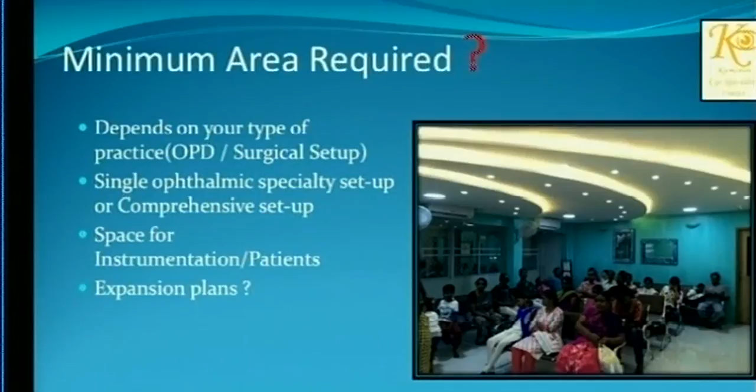What is the minimum area required is a very difficult question to answer, and as a single practitioner or a group practice, plan everything for 5 to 10 years from now on. How many patients you want to get, what is the location, whether you want to set up a single ophthalmic practice or a comprehensive ophthalmic practice. So all this has to be decided initially so that you could design your OPD, the structures of the toilets and the theater, everything. And always have future plans in mind so that you can always extend later.

So the main principles to be taken, see, a lot of time you will find yourself traveling in the right direction, but in a totally different road. You'll never know.

Only when you arrive at the destination, you'll find that you are in a totally different place. For example, you finish the RCC structure, then you call the fire engineers or the HVAC engineers. They say you have to break this and break that. So it's very difficult. Have a plan before you venture into the project. Keep on planning continuously with the architect, and only then it will be helpful.

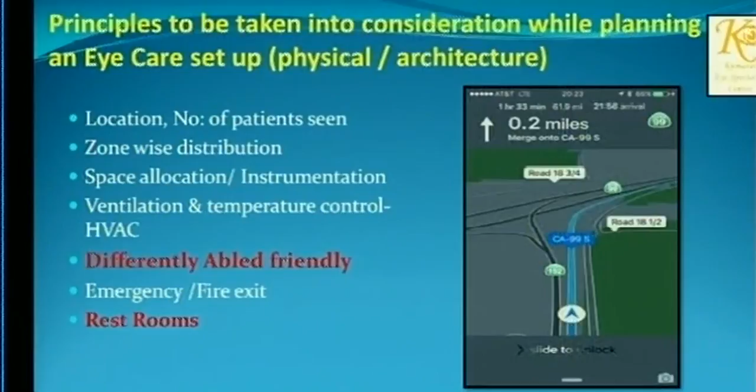The major factors which we normally neglect in a smaller setup are the HVAC system, making toilets for differently abled people, restrooms, and emergency exits. So understand that though you are the captain of the ship in a single specialty place, it needs a multidisciplinary approach. Involve as many architects and biomedical engineers as possible.

So yourself as the captain of the ship, involve all these structures, and the ultimate aim is making the facility patient-centric. So this is the main area which you should concentrate on, the patient. This should be very easy for all architects here, the engineering approach and the ergonomic approach. The engineering approach is technology-centered and puts people to fit in. The ergonomic approach puts people first and fits the technology around it.

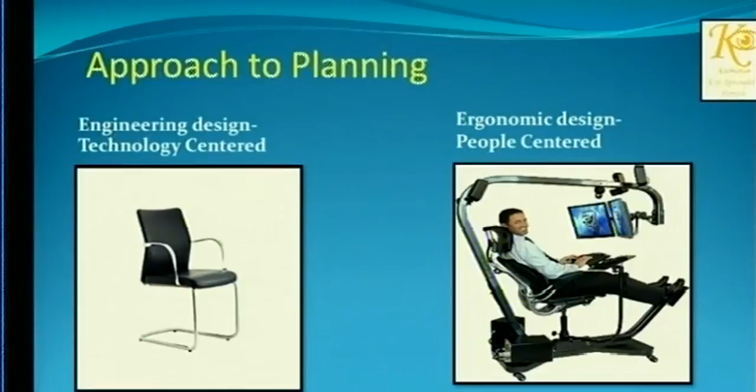So a simple example here, the chair on the left does the job well. A patient can sit there and he can also work. But look at the chair on the right. The user is very comfortable, he's happy, and he can do all kinds of work on that, and the resulting thing is that he's more efficient. So this is what the latest technology should be. It should be ergonomic design and people-centered.

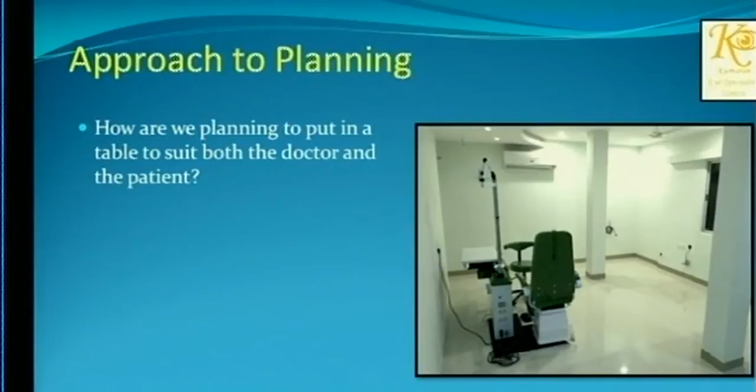So how do we bring this here? I've given a small example of what we did. So this is my consultation room. Sorry for the pillars in between because this was a renovated building. So I wanted to sit at that one corner. This is the southwest corner according to Vastu, and I put my patient here. So now, how am I going to design my table? It has to accommodate me, my patient, my attender, and also the pillars in between.

So we designed a table like this, and I should thank my architect for designing this, and this is what we got. So this is what I say. You put the people and the patient in there, and then you design the technology around it. Your ultimate aim should be the patient. And once you make the patient happy, he will recognize everything you have done for him.

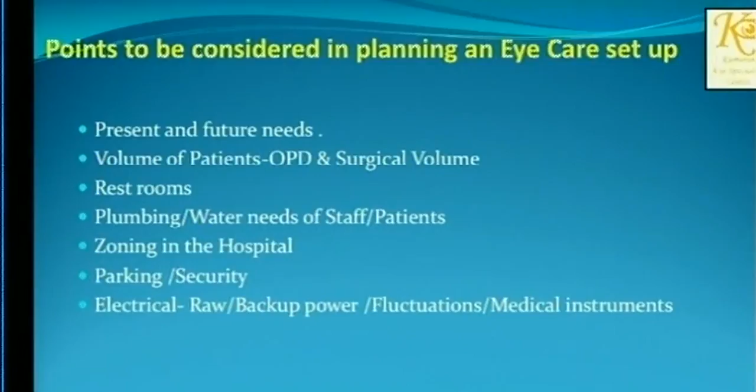So the points to be considered are the present and future needs, the volume, the restrooms, the plumbing, and the different zones, as Mr. Israel had already put forward. Some of the zones to keep in mind are the parking, security, the outpatient area, surgical area, inpatients, and all this depends upon how much load you are looking at and the future plans also. The key areas I would consider in any facility, however small or big, are the optical area and the operating room. These are the most crucial areas, and maximum effort should go into making them patient-friendly so that they generate maximum income for you.

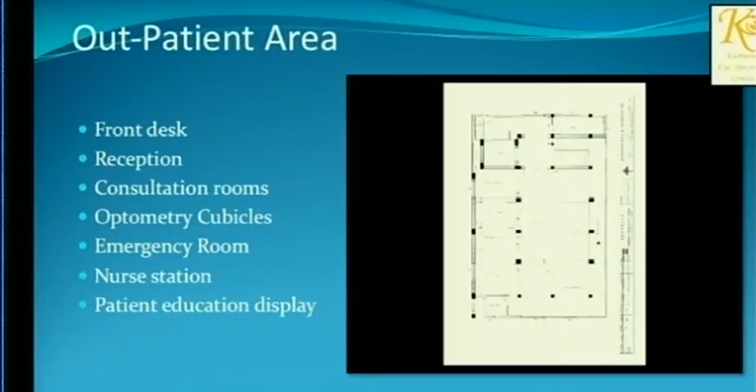The outpatient area: I would call my center a short-stay surgical center. Daycare is an older terminology. In a short-stay surgical center, the patient and the relatives spend maximum time in the reception area, so try to make it as comfortable as possible. And even though you are a single practitioner now, always think that you're going to hire more doctors later, and try to put at least 2 or 3 extra consultation rooms, and interconnect all these consultation rooms so that cross-referrals are possible. Also consider the optometric cubicles, emergency room, nurse stations, and patient education displays, which are very crucial.

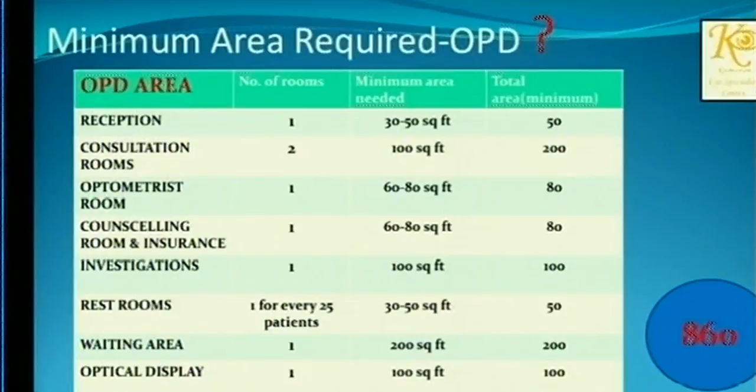So for a single or a group practice, I've formulated the minimum area that is required. Of course, I'm not taking into consideration the corridors. For a single doctor ophthalmic consultation, you need a minimum of 860 square feet to make the patient comfortable and not claustrophobic. The optical area display, as I told you, is one of the crucial areas which generates maximum income for the hospital.

It takes care of all the running needs of the hospital. So make it in the center of your place where people are made to walk through the place, let them see what they display. So in this way, you can also reduce the staff who are showing the frames to the patients. The patients can walk around, look at all the frames on display, and then they can choose by themselves, something like the supermarket technology.

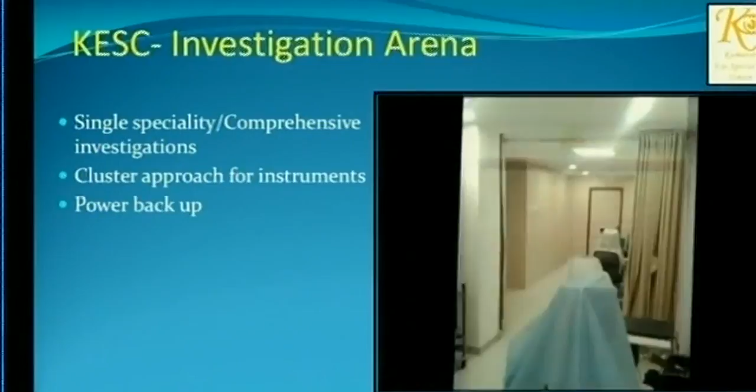So the investigation area depends upon how many doctors are there in your hospital. If you're a single doctor, then you would not be using all the investigation modalities at one point of time. Why I'm telling you this is, suppose if all your investigations are being used at one particular point of time, you need to calculate your electrical load also much higher, probably 20 to 30% more than what is required.

So otherwise, suppose if you plan for a small electrical backup, and as days go by, you're using more than one facility or one instrument, it will lead to a problem. So try to utilize the space maximum.

So now coming back to the operating standards, most of your energy and resource goes into designing the operation theater, because this is something which you cannot renovate later. So give maximum importance to it. These are the standard NABH requirements required for any ophthalmic theater. When we started constructing our theater, these NABH standards were not there.

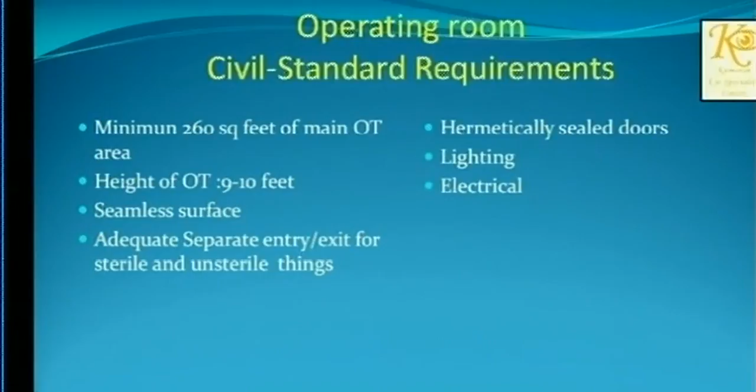It was only a basic and general specialty theater which needs 400 square feet and 10 feet height. But now it has been reduced to 260 square feet of operating area. And if you're planning to share this with the general specialty clinic, then it is not possible. You have to go for a 400 square feet with a 10 feet height. The basic factors are to provide a seamless surface, take consideration for the entry and exit, and the lighting and electrical.

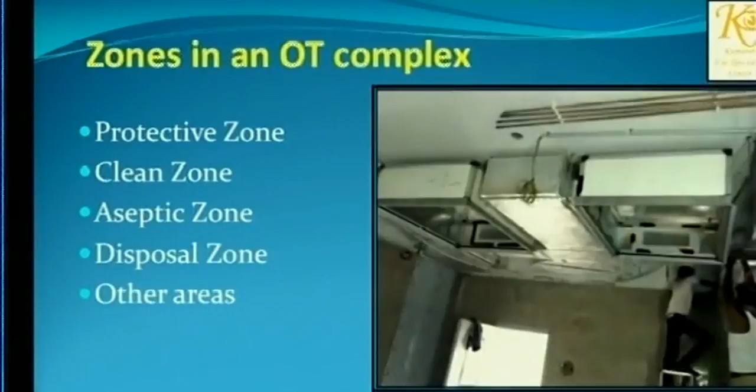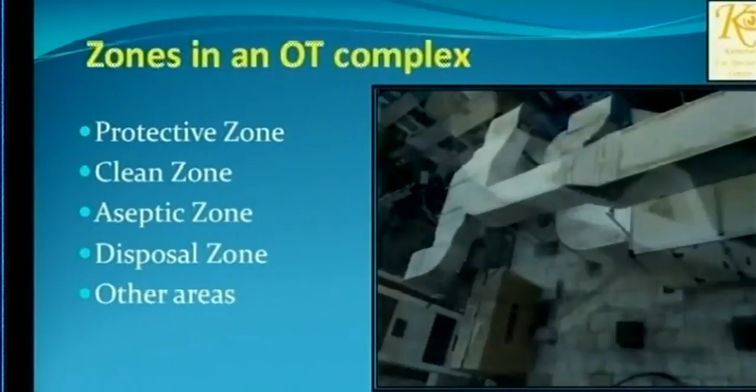So whether your facility is small or big, these zones have to be kept in mind: the protective, clean, aseptic, and disposal zone. The basic concept is the microbiological content decreases from outside to inside, and the positive pressure increases from outside to inside. These are basic concepts which you should keep in mind, however small or large a facility may be. So this video shows you the way we went forward right from renovating a place and how it all featured.

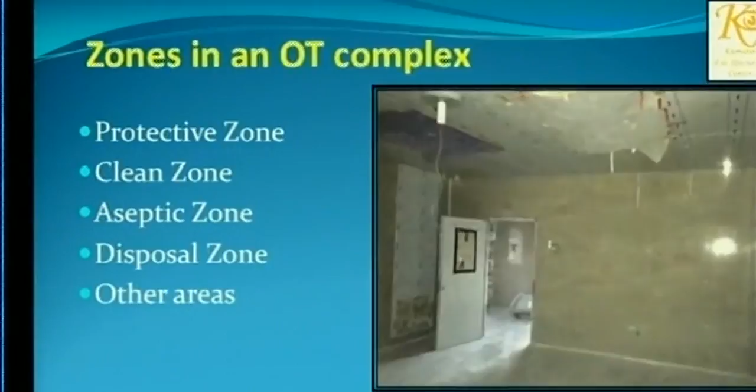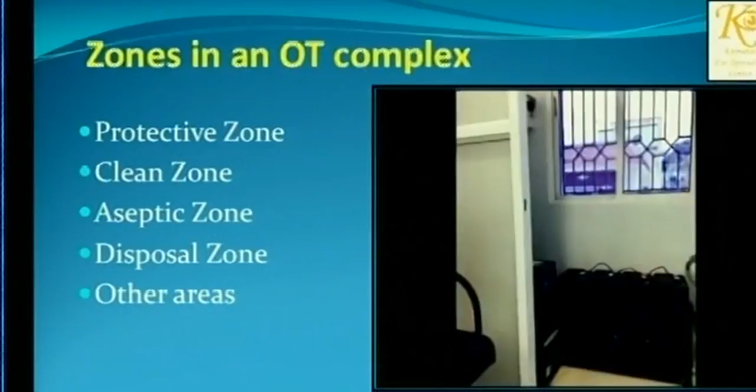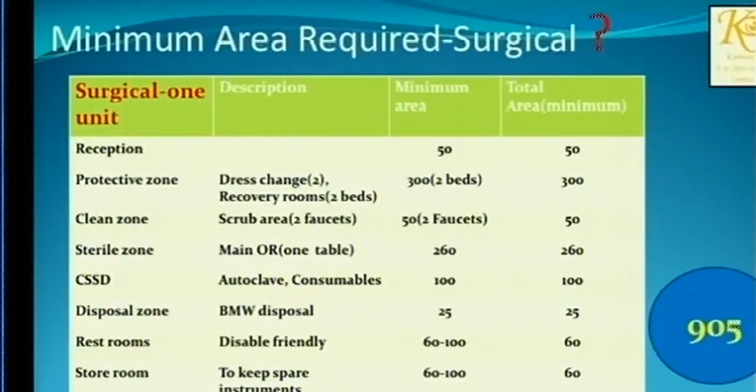Okay, so see, this is the minimum area that is required for a single cataract practice. So I've taken all the protective zones, clean zone, all into consideration. As you could see, the major areas go to the sterile zone and the protective zone, where you have the recovery beds of minimum 2 beds. So I've not taken into account the corridors in between, but if you put in a corridor, the traffic flow would be much, much easier.

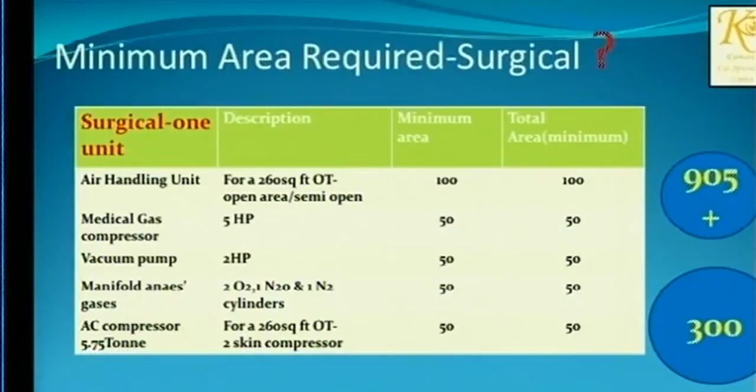And if you are going to incorporate an HVAC system, these are the minimum square feet that is required to put in an air handling unit, a compressor, vacuum manifold, and the minimum tonnage you require for 260 square feet is 5.75 tonnage. So these I'm not going to talk on. These are basic things on how a protective zone, clean zone looks like. I'll skip all these slides. So I'll give a short note on the theater sterile supply unit.

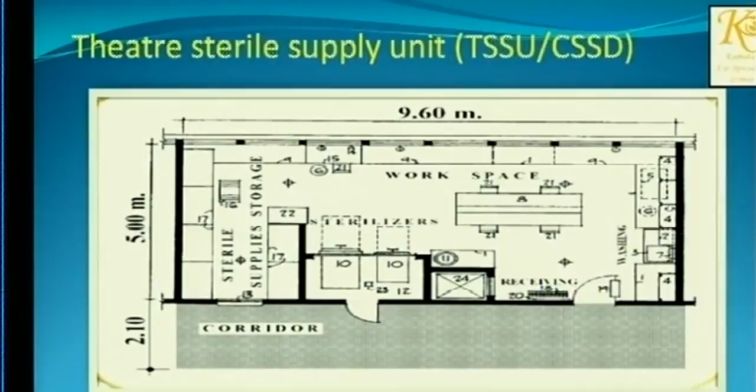Zoning is also important in a sterile supply unit, where you have to have separate zones to receive the instruments, clean them, pack them, store them, or again re-autoclave them. So this is the chain of facility where I have installed a distilled water plant and a high flow air gun, which is very essential to clean hollow instruments which we use in our practice. And the basic thing is the vertical autoclaves are not used anymore.

The best one is to install a horizontal double door autoclave if it is possible to put it in your setup. And this is a horizontal double door autoclave with a data logger, with all your records stored in the computer. You need not record all this until you get a legal problem. When the legal problem comes, they ask for all the records, and when you show your computerized records, it adds more value in the court of law.

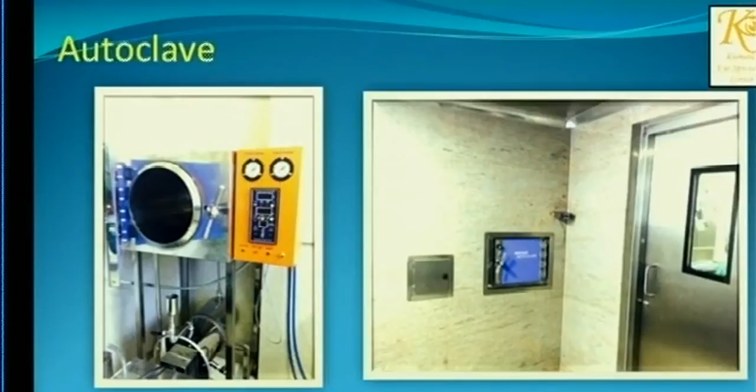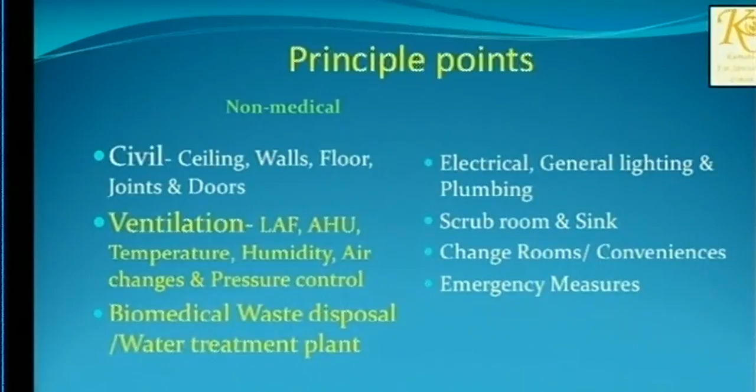So this is the other end of the double door autoclave, where it opens up into the clean zone and goes directly into the sterile zone. So the non-medical and medical points are important for a doctor to know. The principal points are civil: what you're going to use to cover your roof, your walls, or your floor, the ventilation or the HVAC system, the biomedical waste, and so on.

So basically, you have a lot of goods to choose from to cover your walls. You can use the modular OT, depending upon your cost. You can use aluminum, PCGI, or stainless steel. You can use stones, as Sir has said, either granite or Kota stones, or simple vitrified tiles. I would always suggest stainless steel for your roof, because this area you're not going to clean very often, and stainless steel by itself is bacteriostatic.

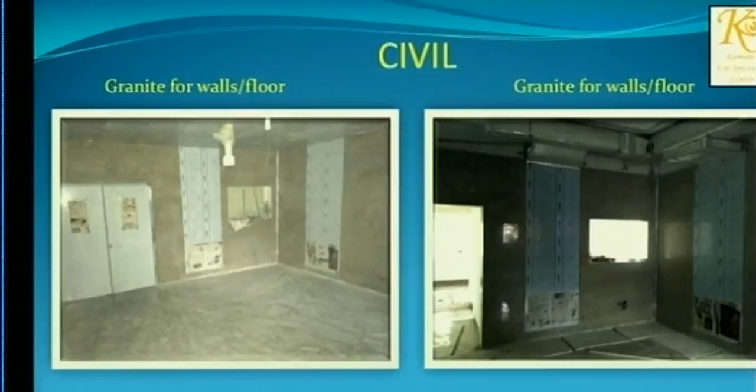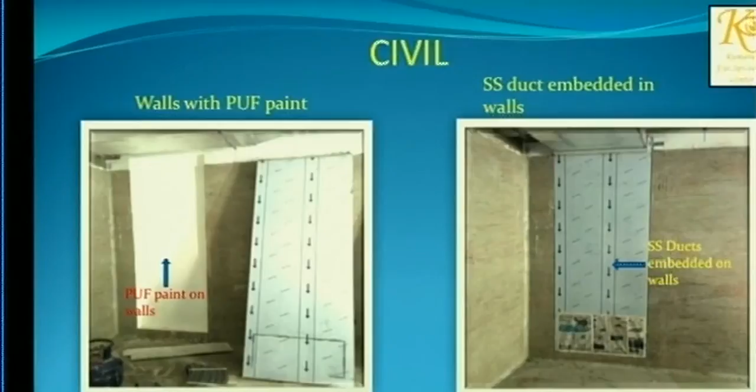And see, this is what you see. In most of the hospitals I visited before I went into this project, at the end of the operating room you'll find the return air ducts coming outside. So in a place where there's already a space constraint, what we planned was we embedded all the return air ducts into the 9-inch wall, so that even that little amount of space will help you later on. And make sure you paint these inaccessible areas with antifungal polyurethane paints, which prevent microbiological growth later on.

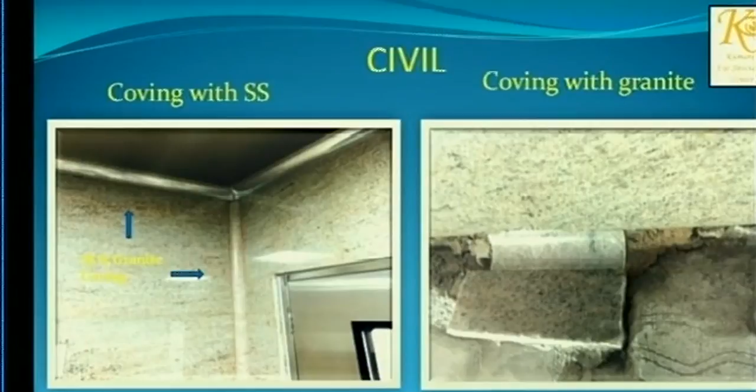And make the edges of the walls coved. You can use plastic, stones, or metals, depending upon what kind of budget you want to allocate for that. Your doors have to be at least 6 feet in height and 6 feet wide, so that you could wheel in your patients during emergencies. You might think that you would not have an emergency at all in your place, but believe me, it can happen anytime. Last month, we had a death in a facility, and we did all that we can, but what happens beyond that is beyond your control.

So try to have your facility designed to handle all these emergencies also, because the patient attenders are looking at everything you are doing. And suppose you have a code blue in your hospital, and you're not able to wheel the patient out, all this adds against you in the court of law.

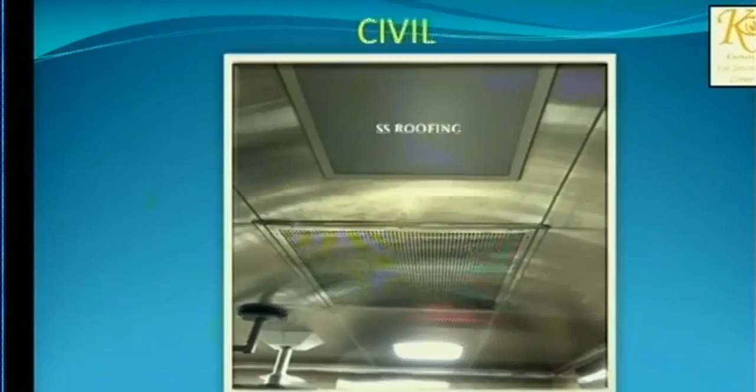So the SS roofing or the false roofing is very important in any healthcare facility so that it conceals all the ducts and the electrical wiring above. This you have to plan earlier. If you're planning a 10 feet height, your RCC slab has to be cast at around 12 feet. All this you have to tell your architect, who does not have prior knowledge about designing a hospital. The ventilation system I would call the mother of your main theater, and these are the standards available according to NABH.

So the AHU, the air handling unit, the compressor, and the laminar airflow form the HVAC system. If you go to the interior of the air handling unit, you have 3 chambers. The first chamber draws fresh air. The second chamber cools the air. And the third chamber blows this air into the theater. This is very important because, you have a car, and in the car you can go at 10 kilometers per hour, and you can also go at 100 kilometers per hour.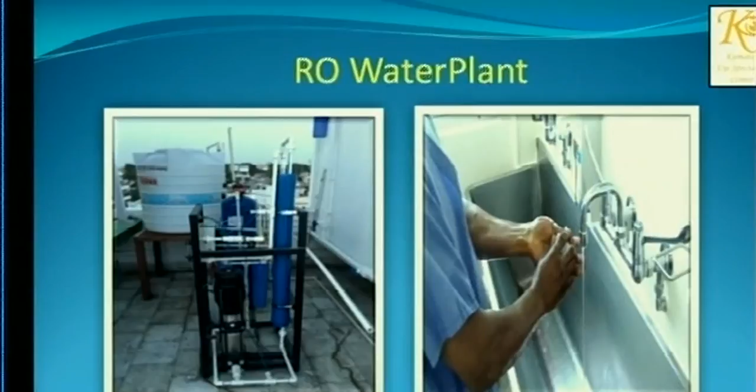The water quality also has to be considered when building a hospital. You have to follow the ISO water quality standards, and the most simple way of doing it is installing an RO water plant, which not only makes the water bacteriologically free, but also reduces the salt in it. So this is the water test which we did before installing an RO plant and after. The main culprit is the hardness of water. You could see how much the hardness of water has decreased.

But also consider that the major source of water to be used in an ophthalmic facility has to be only distilled water, because it makes the dissolved salt 0 and also increases the life of your equipment. And we also have a terminal UV filter. We don't use boiled water to wash our hands before we go for surgery. I basically get a separate line from the RO plant to a terminal UV filter, and we wash directly from the faucets. But however, you have to have repeated water cultures to make sure that this is bacteriologically free.

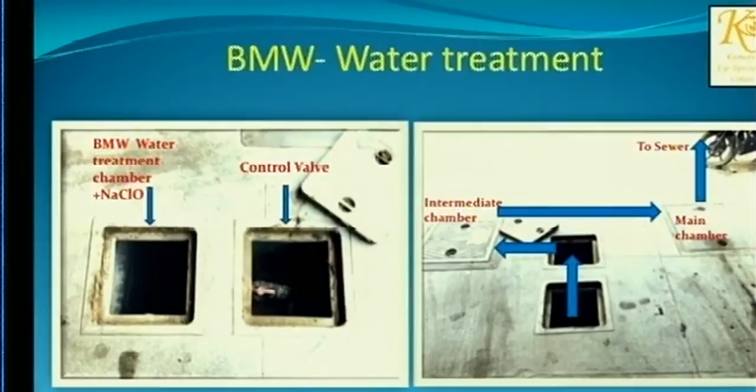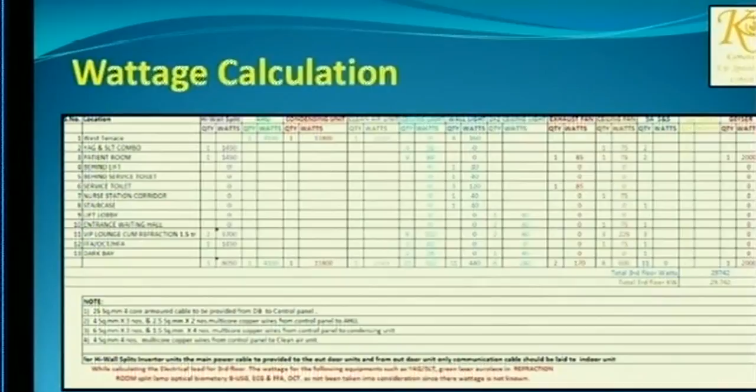The biomedical waste control is very important. For smaller setups, you need not construct a plant. You can have a separate line which takes all the water from the theater into a separate chamber, which is disinfected and then let out in the main sewage. The electrical points are also very important. Calculate the wattage you need for every equipment you're going to put. Add 20% more, and then decide on the wirings you're going to put and the backup power.

If you want to install a surgical pendant, if you're doing orbital cases or other cases, this has to be installed right at the time when you install your RCC slab itself. So the electrical source of power should be kept in mind. See, inverters for everything which is above your head, and anything below your hip, you go for the UPS online power and raw power also.

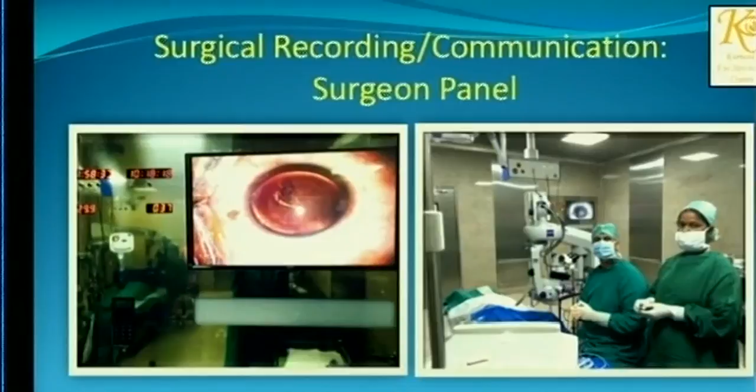This is the surgeon control panel. Though it is not mandatory, it reduces a lot of headache for you. So you make a big opening in the RCC slab, in the wall, and one end I have fixed in stainless steel which encloses all your electrical recording equipment, your power regulators, everything. And so this clusters all the wires, nothing is hanging on the wall, as you could see here. The other end could open into the clean zone, the protective zone, which helps the technicians to take care of any technical issues later on, so that your technician need not go into the theater while handling or servicing these equipments.

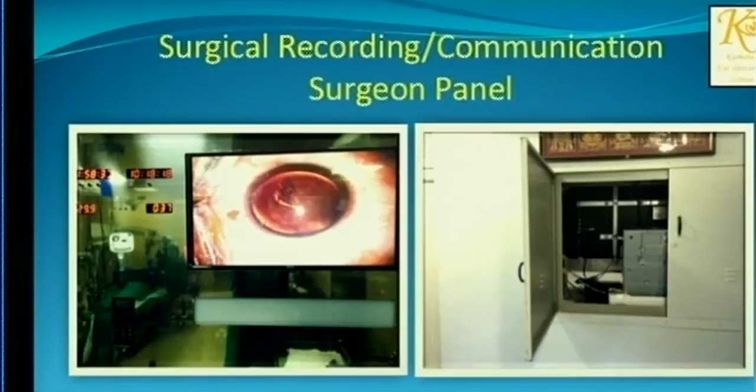As I told you, make your toilets differently abled friendly. You have to have wide opening doors, rails around, and also an alarm bell inside the toilets in case they fall. They need to call you. These doors should not be locked from outside. They can be only locked from inside. And fire exits, see, according to your local requirements in your place, kindly follow those principles.

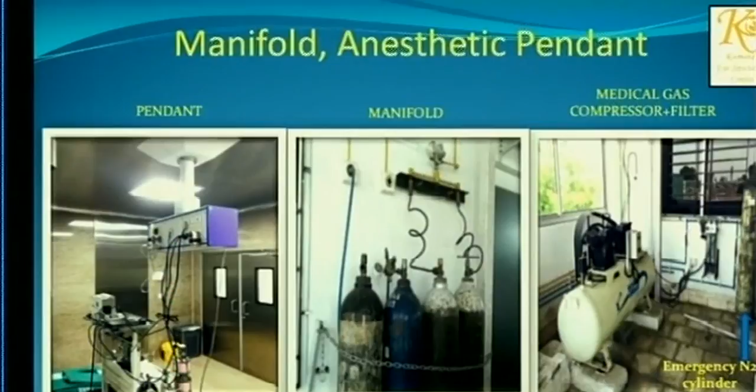The manifold and anesthetic requirements are usually neglected in any small healthcare facility. Try to implement them as much as possible. And finally, whatever is done has to be validated by a third party. The main thing is your OT validation, which validates all this to make it operable. Thank you.